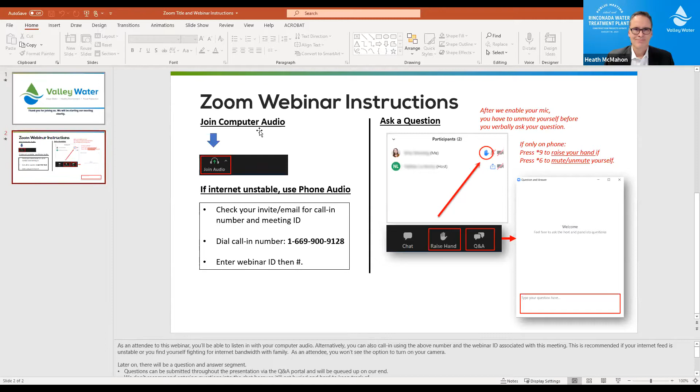Heath, go ahead. Heath, you're on mute. You're on mute. Oh, all right, there I am. Sorry about that.

All right, thank you, Tony. Good evening, everyone. Welcome. We appreciate you being here tonight in this virtual setting as we prepare to start two new projects at the plant. One will focus on site improvements and the other on upgrading the way we manage sludge from the water treatment process. In their own way, both play an important role in Valley Water's mission to ensure every facet of our infrastructure remains up to date and reliable. We'll detail the work, the schedule, and how we plan to offset some of the potential impacts that come with construction. We welcome your questions at the end of our presentation, and if we can't answer right now, we'll work to get those answers and follow up with you.

At this time, I also wanted to acknowledge Director Shua, who is here attending the meeting. I want to thank her for her continued support of critical projects we're doing throughout the district, and especially this one at Rinconada Water Treatment Plant. At this time, I'd like to turn it over to the unit manager for the project delivery team for the water treatment plants, Brandon Ponce.

Thank you, Heath, and good evening, everyone. Thank you so much for your time tonight. A few years ago, this would be part of our meeting where we would get together outside of our conference room and go on a quick plant tour to show you in person the progress that we've made since we started the plant upgrades. I am hopeful that we can do that again soon.

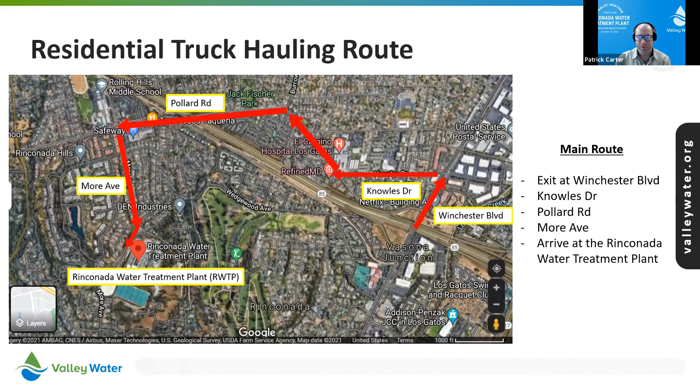So the truck hauling route comes off of 17 to Winchester Boulevard and then till Knowles, Pollard, and up More Avenue into our Lower More Gate at the Rinconada Water Treatment Plant. Next slide, please. And truck routing throughout the plant, like I mentioned before, will come in this Lower More Gate and make its way through the plant.

At this time, we will not have major construction traffic going out of Granada Gate. That's a change from our previous projects, and these projects are small enough that we're able to close that off to construction traffic. So with that, Brandon, I'll turn it back to you.

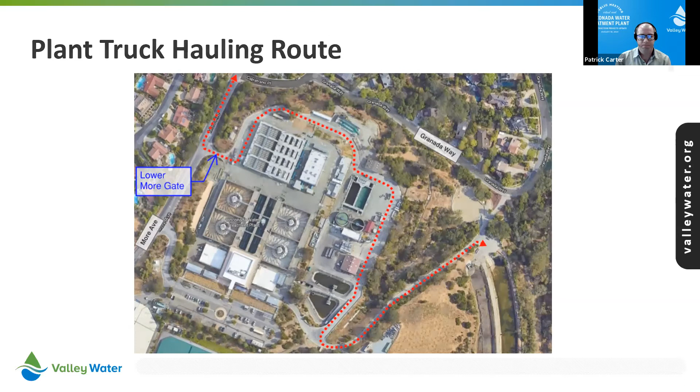So thank you, Patrick. Next, I'd like to introduce Mae Siendo, our project manager for the interim site restoration project. Take it away, Mae.

Thank you, Brandon. Good evening, neighbors and members of the community. My name is Mae Siendo. I am an associate engineer in the water treatment plant delivery unit. I have been in the district for the past 12 years. I'll be presenting to you the Rinconada Water Treatment Plant interim site restoration, where my main role and responsibility is the project manager. Next slide, please, Jada.

The main purpose of the interim site restoration project is to perform transitional work necessary to support Rinconada Water Treatment Plant up 24/7 operation. This transition period is between the newly completed phase 1 and 2 and the future phase 3 to 6. The interim project supports Valley Water's mission of providing Silicon Valley safe, clean water for a healthy life, environment, and economy. Construction of this project has been recently awarded to NTK Construction for the sum of $2.6 million.

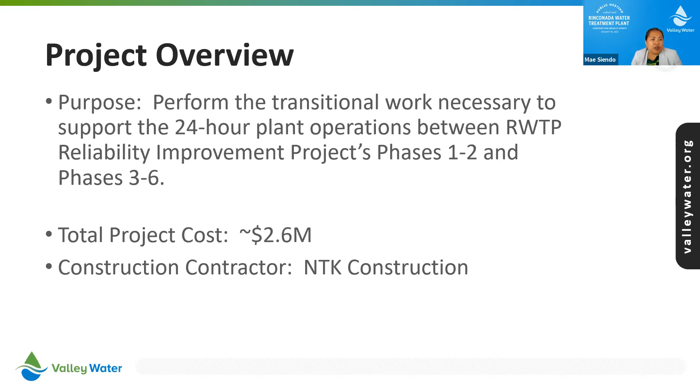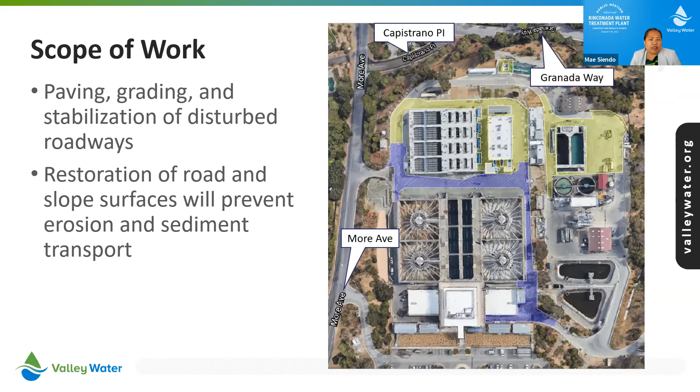Next slide, please, Jada. Thank you. Construction scope of work includes paving and grading and stabilization of disturbed roadways. Road areas will be restored and slope surfaces will be protected. There is also work to install the stormwater infrastructure to complete the tie-in to the drainage system. All these activities will contribute to prevent soil erosion, sediment transport, and containment of water runoffs within the areas of the treatment plant.

Next slide, please. Once these activities are completed and the site has been restored, the temporary sump pumps will be removed. There are other miscellaneous improvements included in this project, such as the addition of a new ramp into the detention basin, as well as mechanical improvements associated with process pumps and piping.

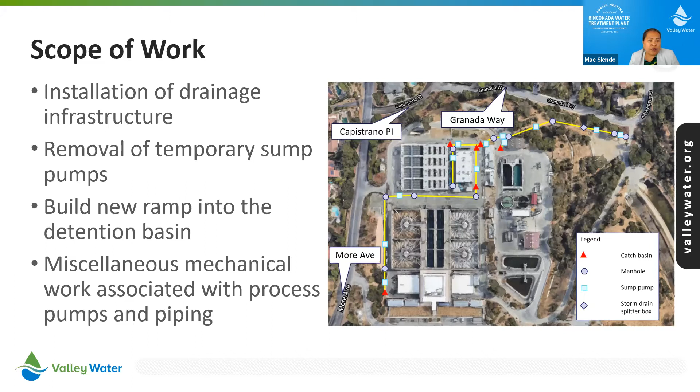Next slide, please. As Brandon had mentioned earlier, the contractor had begun mobilization at the site, and construction is scheduled at the end of the month.

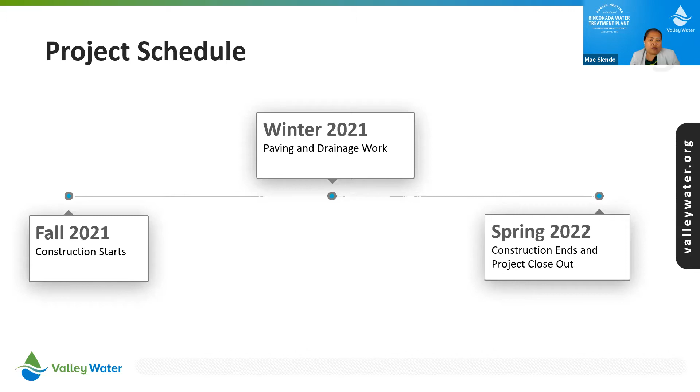So the project schedule, we will start construction on site fall 2021. We hope to finish most of the major work, which are paving and drainage work, by winter 2021. And if as scheduled, we'll complete the project in spring 2022. That completes my presentation of the interim site restoration project.

Patrick, you're next. Okay, thanks, Mae. My name is Patrick Carter. I'm the project manager for the Residuals Remediation project. Next slide, please.

So some project background. The Rinconada Water Treatment Plant solids management system will be upgraded to improve the solids handling, improve redundancy, and meet Rinconada's future water demands. Next slide, please.

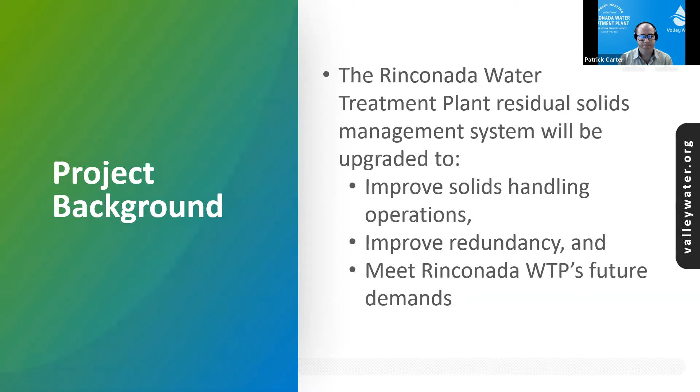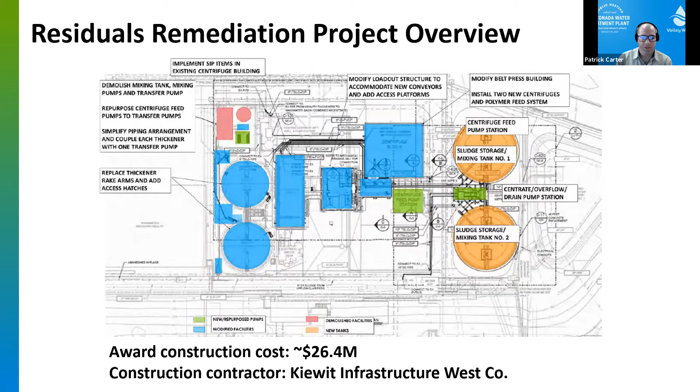So here's an overview of the project. The facilities shaded in blue are existing, and the facilities in orange and green are new ones that we're going to be constructing. The construction cost is $26.4 million, and it was awarded to Kiewit Infrastructure West. Next slide, please.

So here's an overview of the existing process. This system treats the sludge that is a byproduct of water treatment. The sludge comes from other processes throughout the plant to these two large circular tanks on the right, called gravity thickeners. There, the solids are thickened by gravity and pumped into the square building in the middle, which houses two centrifuges. These centrifuges spin at a high speed and separate the water from the sludge, producing a dry sludge cake. You can see a truck in the lower middle portion of the photo, loaded with sludge, which will be taken out to a landfill.

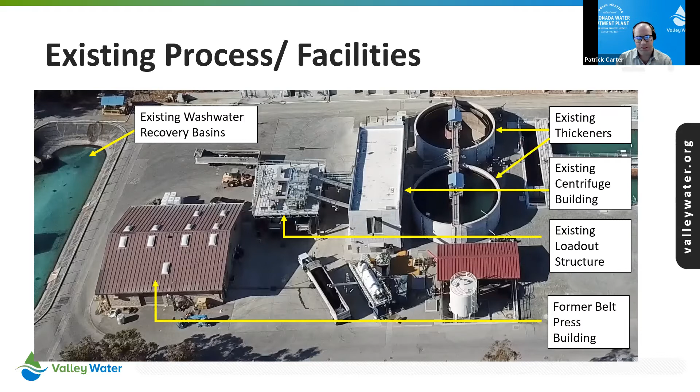The building all the way to the left with the red roof was a former belt press building. That was an old process. We're repurposing that building for this project and placing two more centrifuges in there, so we're utilizing existing infrastructure at the plant. And all the way on the left of the existing wash water recovery basins are where our two large sludge storage tanks will go. Next slide, please.

For this project, the district's designer used a 3D model to help lay out the system to begin with, and then did the fine detail in this Revit model. On the right are the two large sludge storage tanks I spoke of earlier. They have mixers to keep the sludge well mixed. Moving to the left of the screen, the building without a roof on it - the roof was just removed for visual purposes here - is where the two new centrifuges will go.

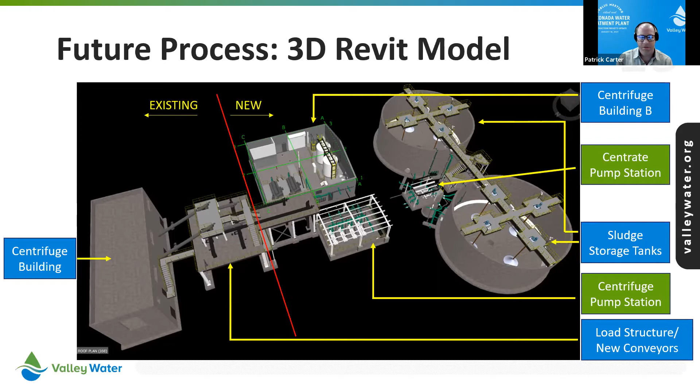The loadout structure, in the middle of the screen, is an existing facility. We'll be modifying that and adding on to accept dry solids from both the existing centrifuge building and now this new centrifuge building. Next slide.

This is an inside view of the building we're going to be modifying. We're going to take out some walls, take out a bathroom, and put in these two large centrifuges. They're about 8 feet off the ground right here. We'll also install these two tanks on the left, which are polymer tanks - a chemical that's added when the centrifuges are in operation to help create a drier solid.

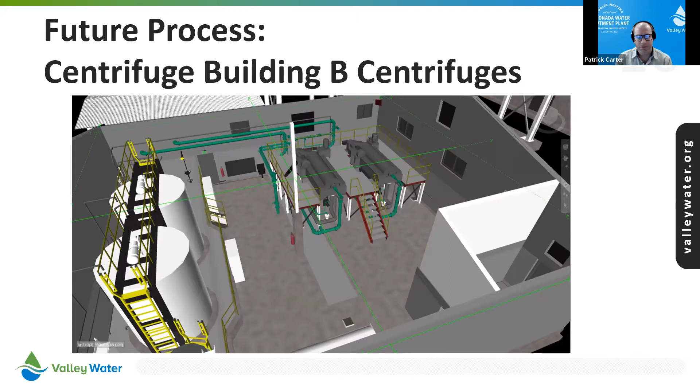Next slide. Here's another view. On the right are those two tanks I was talking about, the polymer tanks. And this is the conveyor load out structure that will load the trucks for off-haul.

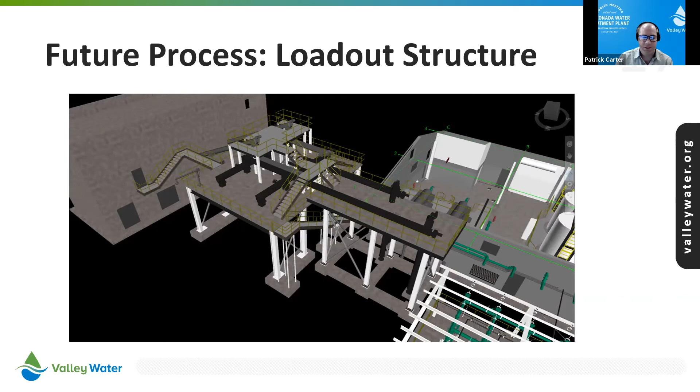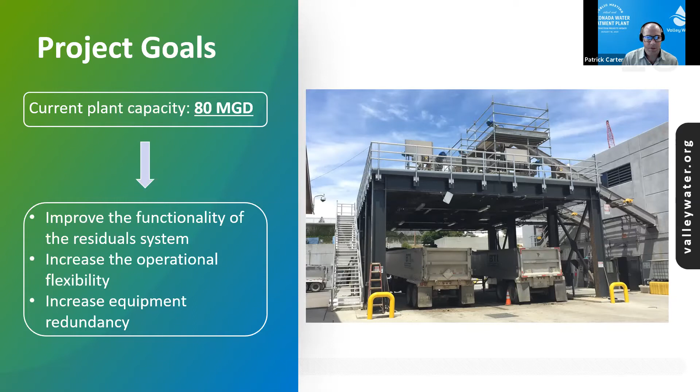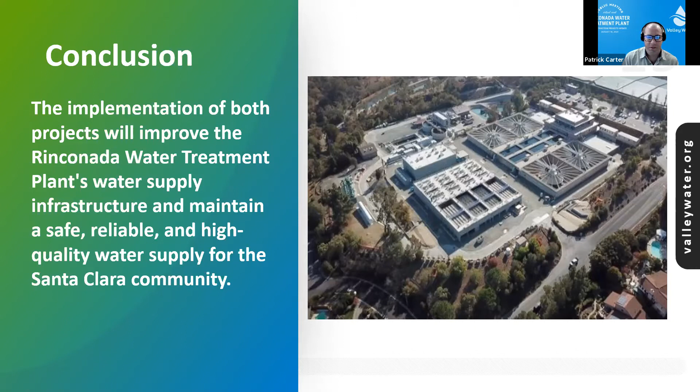Next slide. The implementation of both of these projects will help the district continue to maintain a safe, reliable, and high quality water supply for the Santa Clara community. So thank you.